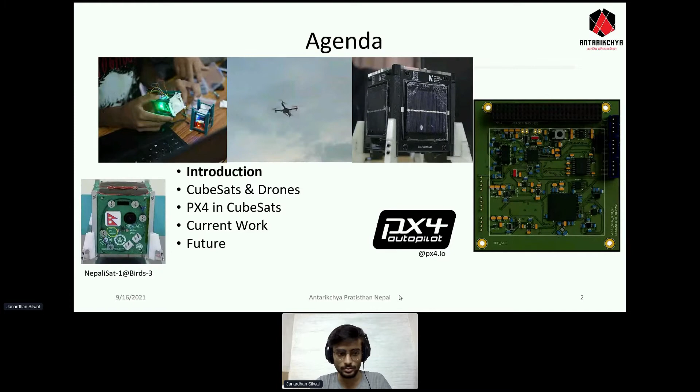Okay. So now moving on to my introduction. I schooled at three different schools. From Pragati Pathsala and Brahmkunta, I completed my high schooling, and from Kathmandu University here in Nepal, I completed my undergraduate in electrical and electronics engineering. After my undergraduate, I was and am involved in two different projects. SastoCube, which you can see in this picture at the top right, is an educational satellite of the 1U standard. It's a CubeSat. We designed it for teaching high school students about what a satellite is and how it works.

And right now I'm involved in Nepali Sat 2 Padayatri as a project manager. This is a project being done in collaboration with Thailand and Nepal. As for the training sessions I've taken related to CubeSats, in 2017 I took part in CanSat training. We'll come back to this in a bit. It happened at IOE here in Nepal, the Institute of Engineering. So that's about it for myself.

Before continuing with the presentation, I'd like to say that at the PX4 Developer Summit of 2020, Dr. Abhas Maskey, who was then a PhD student at Kyushu Institute of Technology, Japan, gave a presentation about using PX4 for educational satellites in CanSats. He talked about how PX4 was used in CanSat, which he designed the training for. It was the training that I took part in back in 2017, and he supervised the overall training session. There we used the PX4 system with the Pixracer board. We used Pixracer as the onboard computer for the CanSat, and we made a demonstration CanSat using PX4.

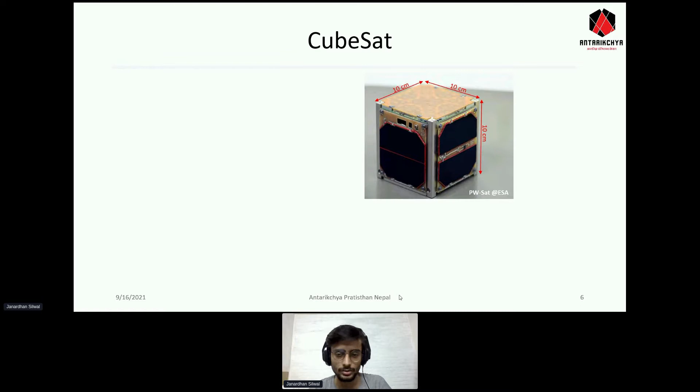A CubeSat is 10 by 10 by 10 cm, that's length, breadth, height. It's a little bit bigger than a Rubik's Cube, and it can fit in your palm, so you can just carry it in your hand. It falls under the nanosatellite category. There are different sizes of CubeSat, starting from 1U and going up to 24U.

So for 1U CubeSat, this is a 1U CubeSat. If you stack two of them, the total dimension being 10 by 10 by 20, that becomes 2U. And if you stack one more on top of it, that becomes 3U. And if you just keep on stacking, you can go up to 24U in size for CubeSats. Until 24U, it still falls under CubeSat.

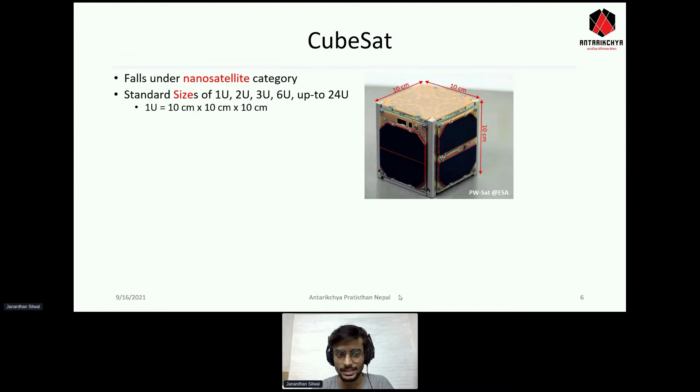So the standard size for 1U is 10 centimeter by 10 centimeter by 10 centimeter, XYZ. And 1U CubeSat weighs less than 1.33 kg, so it's pretty light actually, not that heavy for a satellite. And the total average power for 1U is 1 watt. So the system is designed to be under 1 watt, because that's the total theoretical maximum power that it can generate, because there is less space to put the

solar panels. Of course, we can increase this by using deployables, but in the standard, you don't use deployables. So that's the 1 watt power system on average, so that everything runs under 1 watt. So this is the SWaP requirements. We call this size, weight, and power requirements, which defines the standards for the CubeSat.

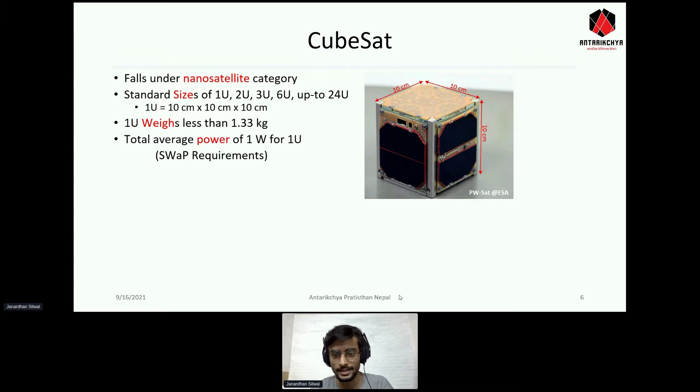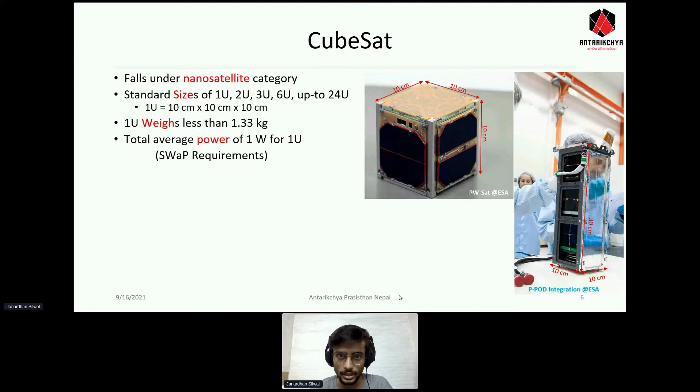this P-POD. I labeled it outside, but the dimensions are the inside, so it's 30 by 10 by 10 inside. So we can put a 3U satellite inside there to deploy it either from a rocket or from the International Space Station, ISS. So moving on with CubeSat.

CubeSat was initially developed to be used as an educational tool for teaching students about space systems, right? But it has been and can also be used to test new systems, new sensors and new technologies that one might want to use in space, at a low cost. Because if we want to send big satellites now, it's going to cost us millions of dollars, right?

But a CubeSat doesn't cost that much. You can just send one for 100,000. It's comparatively cheaper, a cheaper alternative to the million-dollar satellites, right? Of course, some CubeSats are also million-dollar CubeSats, but on average, it costs far less to test a system on a CubeSat than to build a big satellite and test the system, because you don't know if it's going to work or not. So CubeSat became the new alternative for researchers to test new systems.

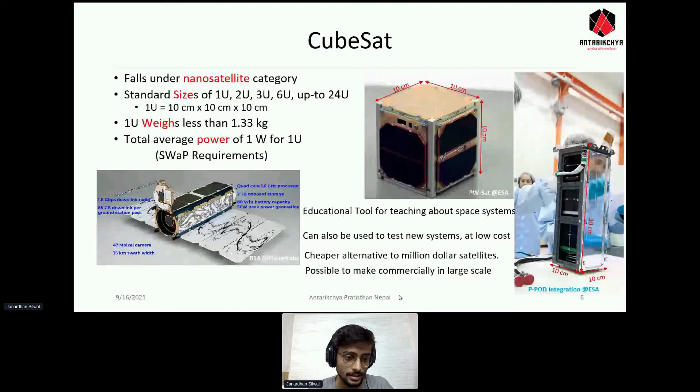And it can also be used commercially, which is being done by Planet Labs. You can see in the bottom left picture, there's a B14. That's the latest version of the Planet Labs satellite. It is used for Earth observation. They take images of the Earth, up to 30 centimeter resolution, and then they compile them and sell them to the consumer. So you can also use CubeSats commercially.

Until now, Planet has launched 475 CubeSats of 3U. Okay, this is a 3U CubeSat. They have launched 475 to date, as of August 2, and are still planning 150 more, according to NewSpace, right? So CubeSat has not only been used as an educational tool, but has moved from testing new systems for researchers to commercial companies launching CubeSats since it was first standardized. So that's the CubeSat.

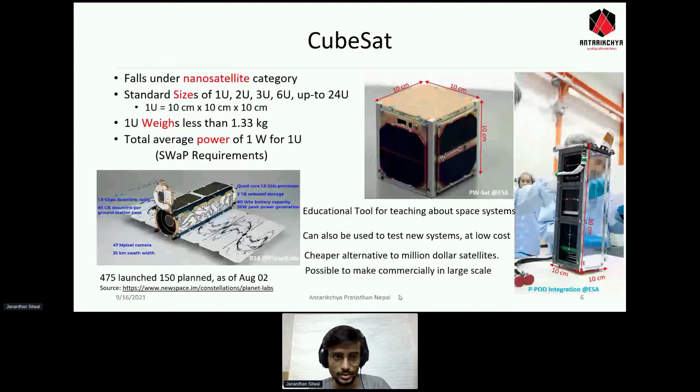Even in 2010 there were just 81 CubeSats, 81 nanosatellites. But in 2021, just the CubeSats that were launched amount to 1638. Now that's a huge growth. It's just growing, and it is even expected to grow more in the coming future.

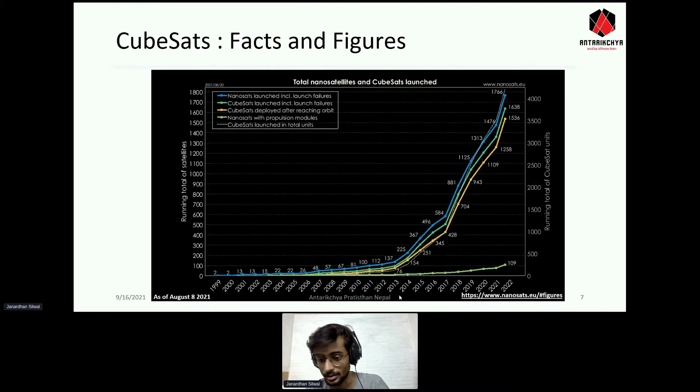The previous graph was about how CubeSats have been used over the years, while this shows us how many CubeSats could be launched and are planned to launch in the upcoming days. So as you can see, there has been exponential growth in CubeSats launched to orbit.

So what this shows us is that we can use PX4 for CubeSats. If we can make it into an operating system that supports CubeSats, then I'm pretty sure these numbers are gonna go way beyond what has been predicted, because currently with the high entry barrier of having no common software, and a tedious design, development and testing process, even with all that, CubeSat usage is growing exponentially.

Now imagine what would happen if there was an operating system which would just say, okay, you download the software, you load it into your system, and boom, the CubeSat's ready. If that happened, the number of CubeSats launched in the coming days would just skyrocket beyond what has been predicted by nanosats.eu.

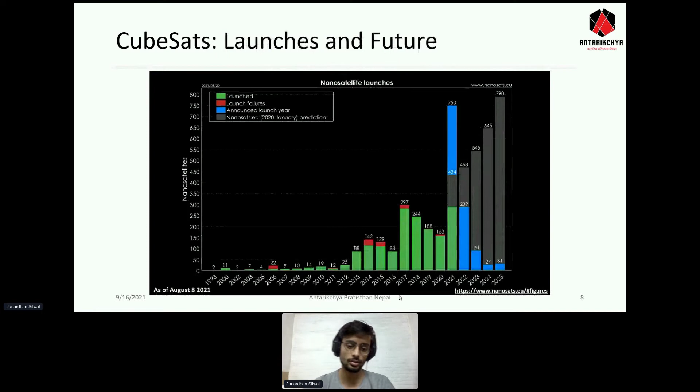So now talking about CubeSats, of course we need to talk about the design process, and the similarities between drones and CubeSats, for software designed for drones to be used in CubeSats. In the CubeSat design process, there are typically 6 milestones, or we like to call them checkpoints. The development time for a typical CubeSat is from 18 to 24 months, most of which of course goes to software design.

Initially we kick off the project, so there will be the kickoff and then the operation phase. In kickoff, we design the CubeSat. In operation, we operate it after it has been launched and deployed. Typically a CubeSat operates for around 2 to 3 years, but its lifetime can increase or decrease depending on the orbit you launch into. CubeSats are typically launched into a 400 kilometer orbit, which operates for around 2 to 3 years. So it just varies.

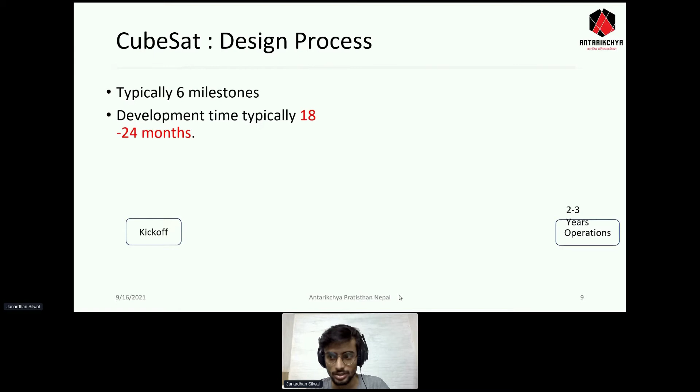After the kickoff, all the design team will sit down together and discuss what the CubeSat is to be designed for. So we'll define a mission for it: what the CubeSat is to do and how it will do it, and then all the missions will be defined.

After the missions are defined, the system also needs definition: how the system is going to work, what kind of systems it's going to use, for example what the current limitation could be, what the power is, what the voltage is. After all the definitions for all the CubeSat systems are ready, we go with the mission definition review, MDR.

In this review, the experts and the whole design team sit down and review whether it's okay or not. Of course there are also stakeholders investing in the satellite who want their own mission to be done, so they also sit down, discuss, and if needed, edit and redefine the missions.

So that's the mission definition review. After which we will start the breadboard model fabrication and operation. So here, since we already have the system defined, we will know what components we need, what we are gonna do, and what we need to buy. So we'll just get all those things ready and then test everything, right? So if it works or not. Does that work? Okay, it works, that's fine. We just test everything, and then we'll make a small subsystem for the CubeSat, and then operate them individually. So that's the breadboard model fabrication.

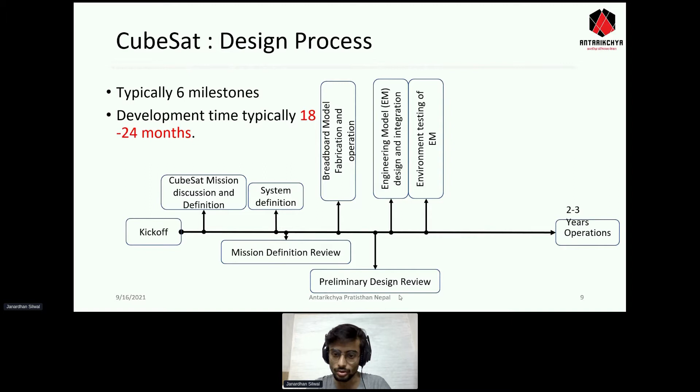And then we'll do the testing of the engineering model, since it's gonna need to survive the harsh space environment, the launches, and all the shocks, as well as the radiation and the temperature variations. So for that we need rigorous testing. So we do the first environmental testing on the engineering model, and after the test report comes out, we'll do a critical design review. Here we'll see if the design system passes, is ready to move forward, or do we need to design again. In the critical design review, we go through everything, and then reiterate it if needed.

And after the critical design review and the changes review, the flight model will be fabricated and it will be tested. So it will be the final model that is to be launched into space. And of course we also do the environmental testing for this model, as we did for the engineering model previously. And then we'll have the flight readiness review. So this gives us the final review. This includes the safety reviews as well as all the test results and everything.

After the flight readiness review, the CubeSat will be delivered to the launch provider. So they will launch the CubeSat either from the ISS, they will launch to the ISS and deploy from there, or it will be launched from the rocket. So there are two options for launching a CubeSat. After it's deployed, it will go into the operation phase. So that was the design process for the CubeSat.

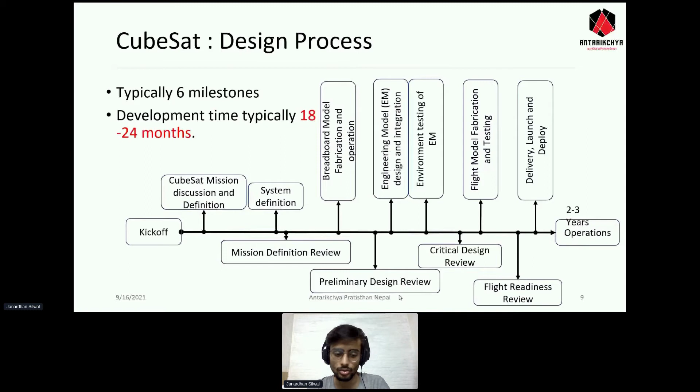So now let's see what the design process for the drone is, and what the similarities between the two are. I'm considering the design process of the Squadrone System here. You can see that there are 5 milestones for the drone development process: identification of use case, proof of concept, prototype development, tests and validation, and industrialization deployment, right? So let's see the similarities with the CubeSat design process.

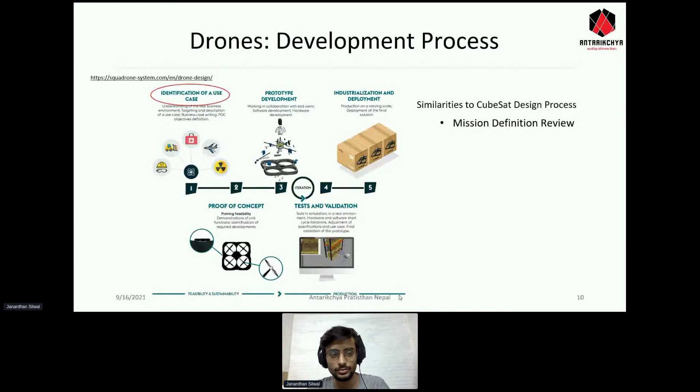So first is identification of the use case. This is equivalent to our mission definition of the CubeSat, and then of course we have a mission definition review. Which should also, I believe, be the case in drones, because after you identify the case, you need to see whether that is okay or not. So in that case, that matches with the CubeSat mission definition review.

And then we go for the proof of concept for the drone, right? So we check the feasibility of all the units. They check every unit, whether it is functioning or not, and whether there are any developments or changes we need to do. So that's what we do in proof of concept, and that matches with our preliminary design review. So after all the proof of concept has been done and demonstrated, we move on with the actual prototype development, right?

So it will be an actual working model, working drones. So in that case, it matches with our critical design review, where we develop a complete engineering model and then present. So we just see if it works or not. So that's the prototype development and critical design review.

So after we do the prototype development, it will be tested and iterated, and then we come to the test and validation point, where we'll see, okay, is it ready to be launched in the market or not for the drones. So that also matches with our flight readiness review. So that's the flight readiness review for CubeSat, and test and validation point for drones.

Then after, there will be deployment and operations. The drones will be industrialized and then launched in the market and consumers are going to use it. And in our case, the CubeSat would be launched, and then we're going to do the missions. So we can see that both the design process of the CubeSat as well as the drone are similar to each other.

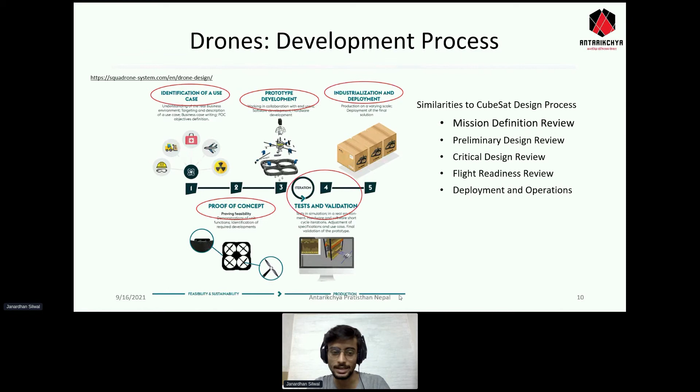So that was one of the motivations behind why we thought, why not use PX4 for CubeSat too, since the design process of drones and CubeSat is similar. So if we alter a little bit in the design process for the drones and a little bit in the CubeSat, then maybe we can use a PX4 based operating system for a CubeSat to make it easier for us to make a CubeSat. So that was the motivation.

So now talking about the drones and their similarities, if we consider the structure of the overall drone system, we can see that the drones have their own airframes, right? In PX4, we get to choose different kinds of airframes for different types of drones. Similarly, CubeSat has its structure, which holds everything in place. So you have different types of structure for different standards of CubeSat.

So for 1U, you get one structure. For 2U, it's another structure, and for 3U, it's another structure. Similarly, they are different for drones too. So in a sense, they're both the same thing. They're just holding everything in place rigidly, the components are being held and then they're operating. So in that case, both of them are the same.

As for the flight controller, in the image I demonstrated the Pixracer, because that's what our team was inspired by, as we had access to the Pixracer due to the CanSat training that was done back in 2017. So in drones, there is the flight controller. For now, let's say it is the Pixracer, which is equivalent to the onboard computer in CubeSat.

So we can also call that the flight controller, or we call it different names, like onboard computer, data handling, and other variations, but basically they do the same thing. They control everything in the CubeSat. So the onboard computer and the flight controller, that's also the same there.

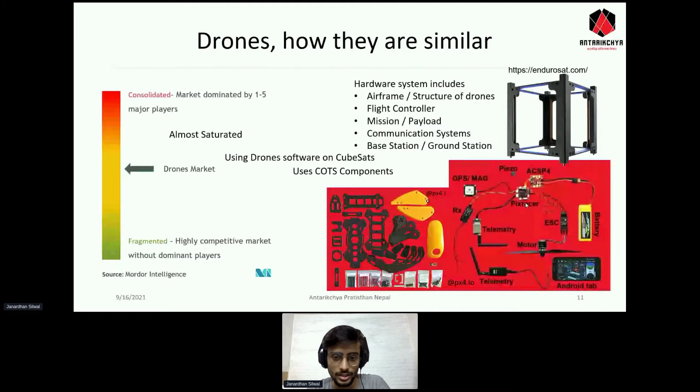So now let's compare. What is the difference between drones and CubeSats? We talked about the similarities, but now let's come to the differences. For drones, there is already a mature system for development, as the market is almost saturated, and almost anyone with a little knowledge can make their own first drone. Of course, it may not do all the advanced features, but I'm pretty sure someone with little knowledge and a bit of internet can make their own drone if they have the right components, right?

But for CubeSat, it's a highly experimental development process. Even if you have a reference CubeSat, because the missions are going to be different, you have to redesign it. You can take a reference but not copy it. Even if you copy it, there are going to be problems, and you'll have to design it, test it, and redesign it again. That is what takes a lot of time. It takes almost 2 years for a CubeSat to be ready, but a drone you can make in 1 or 2 days if you have the components available.

And for the drone, there is already easy-to-use open source flight software. If you want to make your own board, you see the references, design your system, and upload the open source software, in our case PX4, and boom, the drone's ready. But that is not the case for CubeSat, because there's no specific software. It's just individual teams doing their own coding for the system MCUs, right?

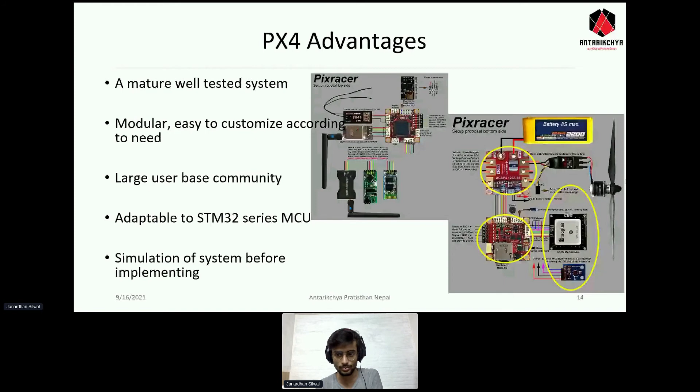So you've got EPS, you've got OBC, and GPS, let's say it's for attitude control, or let's say it's payloads, and you can add external sensors, so those would be the payloads too. So in a sense, the drones that we are using right now are like a CubeSat, just not packed into a cube. It's just spread out and running. It's designed for Earth, not for space. So that will be the difference. Once we design it to work in space, that would be the CubeSat. So that's quite a lot of potential right there.

So what would a PX4 CubeSat be like then? First of all, it would be a modular system. So everything is modular. If you want something, you just put it in. If you don't want it, you just remove it, right? And the bus system for the CubeSat would be fixed, with fixed bus system software. The bus system includes the EPS, electrical power system, onboard computer, and communication. These three systems would have fixed software. So we just upload it and be done with it, right?

And the CubeSat developers only need to focus on their own payload, designing the payload and the interface for the PX4 system. That would allow them to design their missions or payloads more intricately. It would also allow developers to focus their time more on testing the CubeSat, which would ultimately increase the success rate. It's not that low, but neither is it high compared to the drones.

And obviously the PX4 CubeSat would use commercial off-the-shelf components. So it's like the normal daily components that you find in the market. You just use those and build the CubeSat. That is what we've been doing now, and that will be continued.

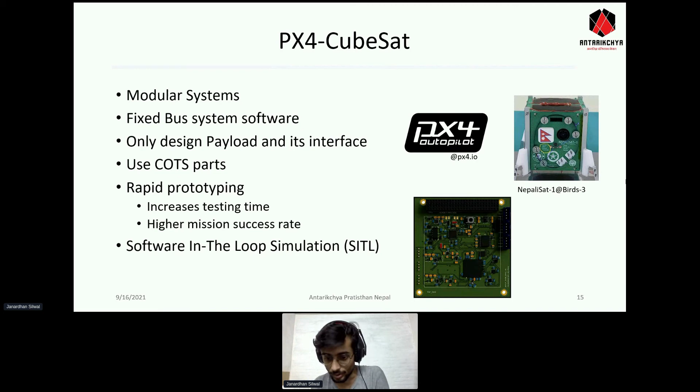That's NepaliSat-1, and the bottom one is the board that we are currently working on. I'll come to it later. So now, what are we doing right now? So we just got an idea to use the PX4 for the CubeSat, right? So now, what are we doing to just make it possible?

So for now, we have a 3U CubeSat, right? We can see the picture; it's just a rough sketch, but that's the CubeSat that we have right now. That is planned to be launched in 2022. And for this particular CubeSat, we are designing a payload. You can see it pointed by the arrow here. Let me just turn on the pointer. Anyway, this is the payload that we have right now. We are designing that payload.

So the payload will be 100 by 100 mm. That's the typical size. For 3U, as we talked earlier, the size would be 100 by 100 by 300. So we're designing a 100 by 100 mm board. That would be the payload for this particular CubeSat.

For now, we have just loaded PX4 firmware into this board, but we have not introduced any form of modification in the PX4. We're just using it as it is for Pixracer, taking the same firmware and putting it inside the board. So this is for the functional test of the board. Before we actually use it, we need to verify if it actually works in space or not, right? So that is what we're doing right now for this board.

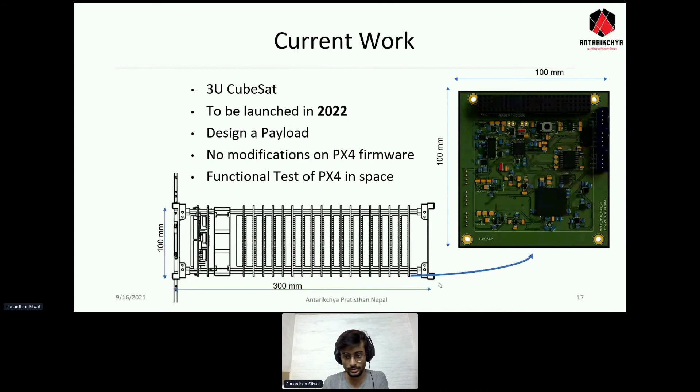So we're testing if the Pixracer system, that's the total compatible hardware and its software, can operate in space over time without any problems, or if there are problems, what kind of problem there would be. So we're just collecting the data for now. In this initial step, we're sending the PX4 as it is without any modification. It will be used for its functional test and to see if there would be any problems. If there are, we can work on solving them, and if there aren't, that's good news for us. Then we can move on with the other future work.

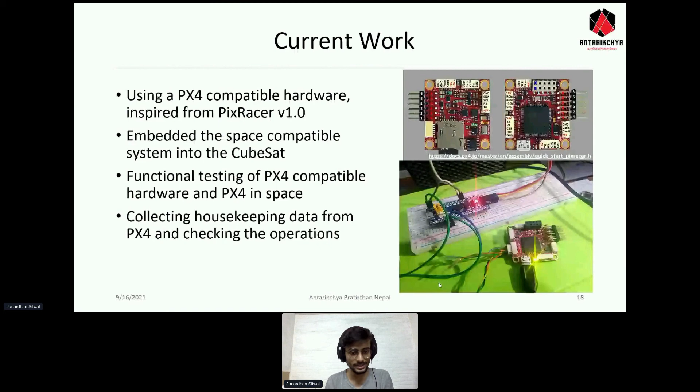Especially since there is the South Atlantic anomaly in space, an area of high radiation density. There is quite a bit of radiation there. So what we want to know is, will the PX4 system, while passing over the high radiation area, still work as it should or not? That is our major focus here. That's why we're doing functional testing of the PX4 in space without any modification. We'll be collecting housekeeping data from the system as well as from PX4 and check the operations. At regular intervals, we'll run it, check the operation and system, and verify it works. If it works, then we'll move on further.

So this center board is the CubeSat payload that we are designing right now. We want to design it in such a way that it would be like a fusion of CubeSat, the PX4 Autopilot, as well as a drone. So it will be like this new system, right? It's also like a drone. The process also goes as if it is a drone, and it's also a CubeSat, and it also has an operating system such as PX4 or middleware. So we combine the CubeSat, PX4, and drone system, and the end result would be that we get to rapidly develop the CubeSat.

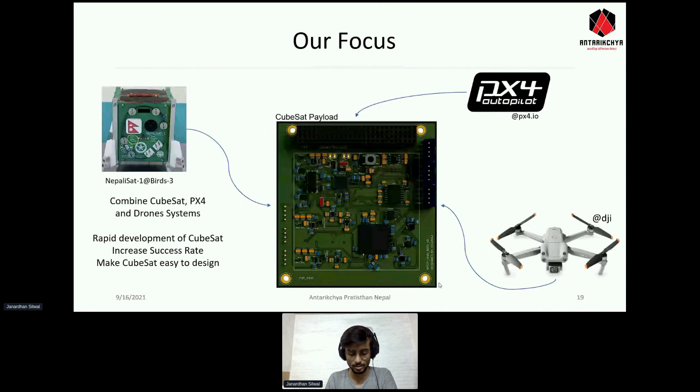Even the new series of MCUs that ST is releasing, the new STM32 MCUs, we can rapidly prototype for them, right? Rapidly prototype new modules for them, as PX4 supports STM. So we can rapidly prototype for newer MCUs. And of course, PX4 has its own support for older MCUs too. So this will ultimately increase the success rate for our CubeSat and make the CubeSat easier to design.

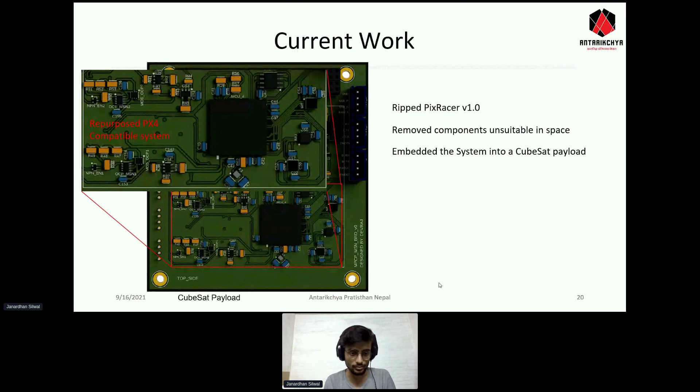And the ultimate thing that we did is we ripped the PixRacer and removed the components that were unsuitable to be used in space or that we did not require on our board. Then the remaining components that could be used and were needed, we embedded in the payload for the CubeSat. So that's the CubeSat payload, in a section of the board. We're not only doing the PX4 mission, but one section consists of the PX4 mission.

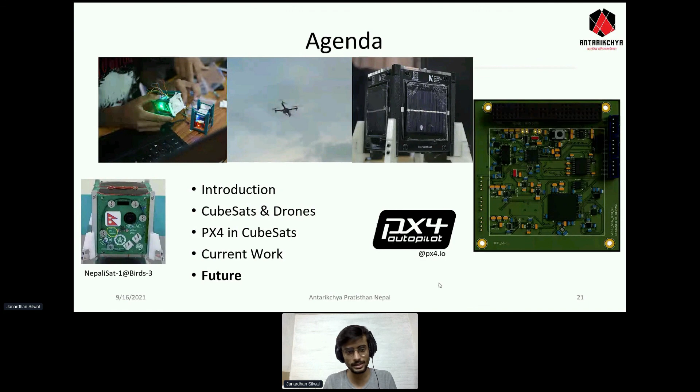So what would the future look like? This is what we did. So let's say in the coming days, what would we do after we complete our current work? After we verify that PX4 is operating normally in space, we move on with active modification of the PX4 firmware. Since right now we are not doing any modification, we'll make the firmware more suitable for CubeSat and include the airframe for the CubeSat too.

So this would ultimately lead to bridging the gap between the drone development community and the CubeSat development community. It's just like a bridge, and we'll get more ideas and new things for us.